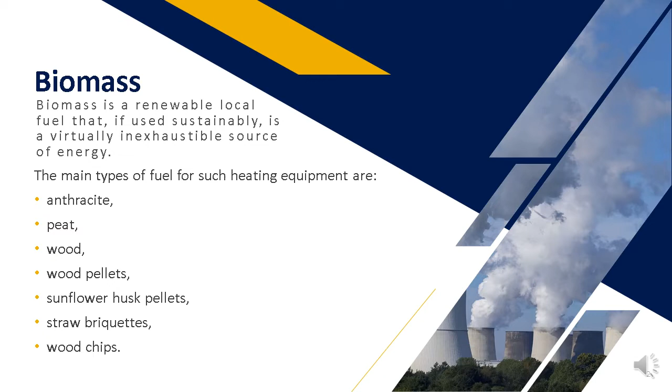One of the important directions for achieving the goals of sustainable development and decarbonization is to increase the share of biofuels, including in heat supply systems. Biomass is a renewable local fuel that, if used sustainably, is a virtually inexhaustible source of energy. The main types of fuel for such heating equipment are anthracite, peat, wood, wood pellets, sunflower husk pellets, straw briquettes, and wood chips.

Boilers for biofuels are usually designed for a thermal capacity of not more than 1 megawatt, because a higher capacity significantly complicates their operation. The logistical component also makes a significant and sometimes decisive contribution. Transportation of biofuel over long distances leads to high freight costs, as well as costs for handling operations, which significantly increases the final cost of fuel.

Thus, the aim of this study is to investigate the impact of delivery of biofuel on the costs of thermal energy, which will develop practical recommendations for the use of remote sources of biofuels for low-power solid fuel boilers.

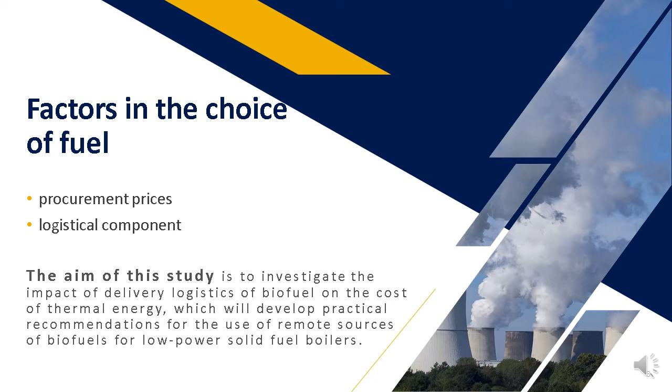The profitability of a boiler plant depends on a well-functioning logistical system. After all, delivery requires certain costs, and if this process is not optimized, these costs can be too high. It is important to ensure full protection of fuel, especially pellets, from moisture, precipitation, and other damages during transportation. Therefore, the best option will be closed bodies, hoppers, wagons. The use of fuel pellets or granules was chosen for analysis only in this article.

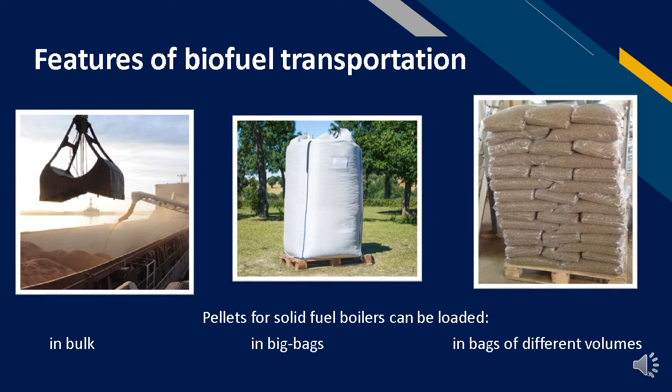Pellets for solid fuel boilers can be loaded in bulk, in big bags, in bags of different volumes. Bulk delivery of pellets is used in most European countries, which allows significant savings on packaging and loading and unloading operations. The choice of specific transport for delivery of solid biofuel depends on the location of the consumer. Let's take a look at several options.

River and sea transportation is an inexpensive way to transport biofuel over long distances. Trucks are one of the most expensive but also the most flexible methods of delivery. This type of transport is used if you need to deliver pellets for a relatively short distance. The best option is transportation under a few hundred kilometers. Rail transportation is the best option for transporting large amounts of biofuel to industrial consumers, who usually have rail infrastructure such as sidings, shunting locomotives, hoppers, unloading devices, etc.

Let's look at how the process of biofuel delivery is organized in Germany and Austria. The specialized truck equipment with a pneumatic unloader is used in most cases. For the transportation of pellets, the tank is divided into 4 chambers, so it can be unloaded at different locations at different consumers. When delivery of solid biofuel is required, the vehicle loads the chambers. The pellets are fed by a conveyor belt, and the unloading process is not complicated.

The machine has a hose that connects to the pellet storage unit. The driver of the vehicle, with the help of the control panels, starts the compressor. The average pressure of the compressor reaches a mark of half a bar. Such pressure is enough to pump up to 400 kilograms of pellets a minute through a hose.

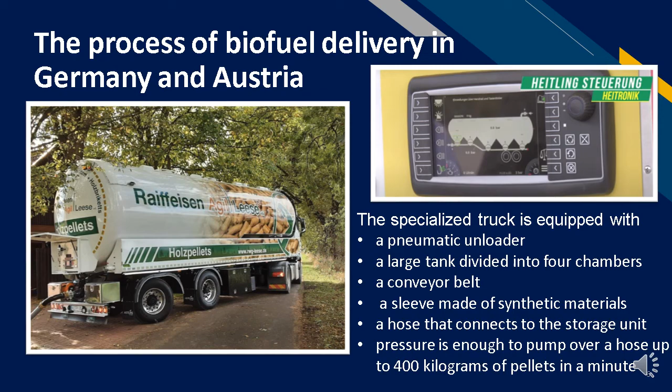Pellets and briquettes are commonly used in the Ukrainian market. They are made from different raw materials. Delivery can be carried out directly from the manufacturer's warehouse as well as from the industrial warehouse. Of course, delivery from the manufacturer's warehouse without reloading is better, since the reloading of pellets does not improve their quality and the conditions of storage in the secondary warehouse may not meet the requirements.

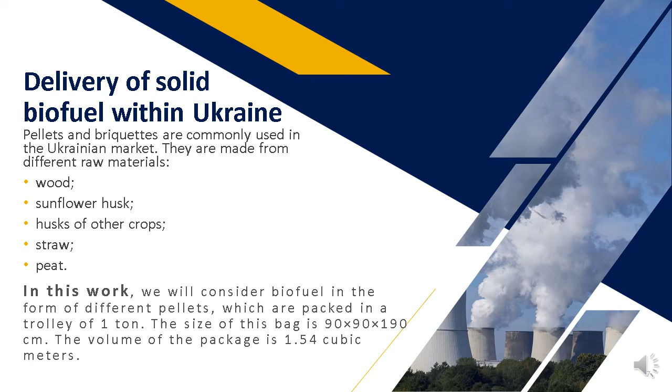In this work, we will consider biofuel in the form of pellets, which are packed in a package of 1 ton. The volume of the package is 1.54 cubic meters. There is a strong trade in environmentally friendly materials, including wood pellets. Ukraine is one of the powerful exporters, which until recently carried out transportation mainly through the port of Odessa. However, in this paper, the authors have chosen to determine the value of supply logistics within Ukraine.

Calculations were made for three distances: 100, 300, and 500 kilometers. Such distances are selected as averages within different types of administrative units of Ukraine: within one district, one region, and between regions.

For economic efficiency comparison of heating projects with different biomass type boilers, we chose the method of levelized cost of heat, which is used by many organizations including the International Energy Agency. The use of levelized cost of heat makes it possible to specify prospective heat generation technologies for implementation. This in turn is needed for forecasting the structure of fuel and energy consumption for heating systems.

For a more accurate calculation of levelized cost of heat, it is also necessary to take into account the cost of delivery of biofuels. Therefore, it is proposed to calculate the average cost of thermal energy for the life cycle, taking into account the delivery logistics. The calculations are done by the expression on the slide.

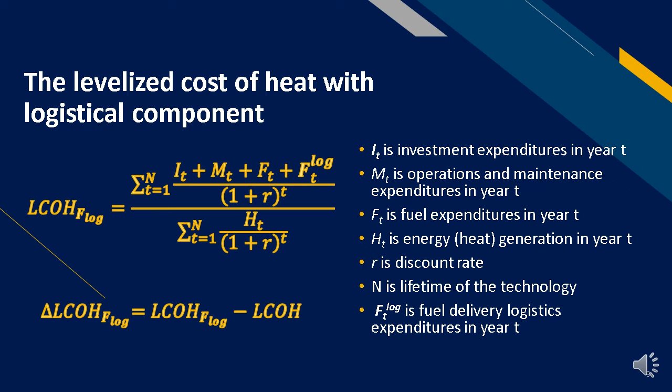On this slide, you can see the results of our calculations. The results show that under the condition of pellets transportation for 500 kilometers, the cost of heat increases by 13 to 20%. The minimum value is for boilers burning wood pellets. The maximum is for boilers burning straw pellets.

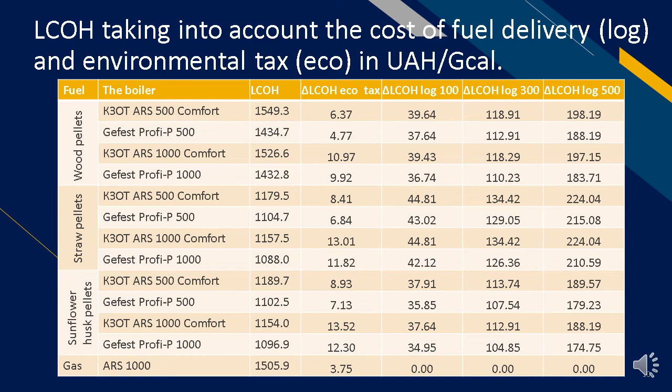The high cost of gas encourages the use of other sources for heat supply, including using biofuels more widely. Wood pellets are 20 to 30% more expensive than other pellets, but have the highest calorific value. Heat produced from wood pellets has the highest cost, an average of 20% more expensive. Taking into account the cost of logistics does not change this. Heat produced from wood pellets remains 20% more expensive. Even with pellet delivery over 500 kilometers, the levelized cost of heat will be lower for boilers burning sunflower husk pellets and straw pellets compared to wood pellets with no shipping charges.